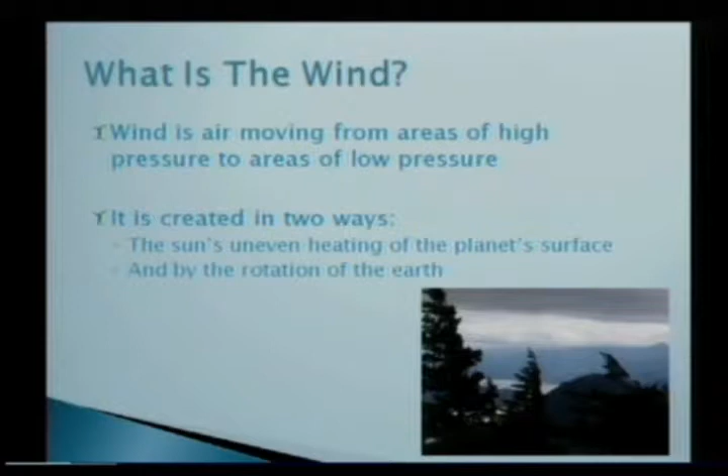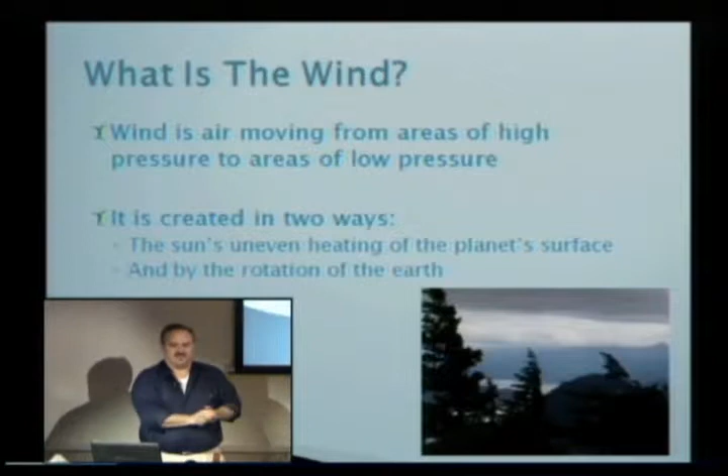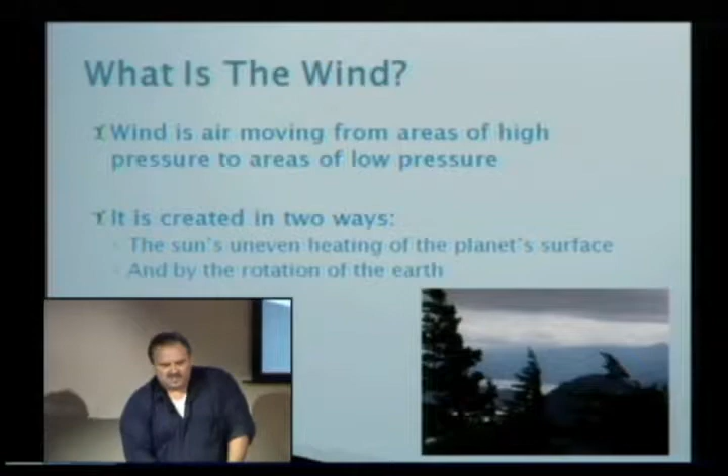First question, to establish a baseline: what is wind? Basically, in its simplest terms, wind is air moving from an area of high pressure to an area of low pressure. It's created in two different ways. First is the uneven heating of the Earth's surface—if the sun hits a lake, it heats up at a different rate than if it was hitting a forest or a pasture. Also, the fact that the Earth is moving gives a certain spin to the atmosphere. So that's, in essence, where wind comes from.

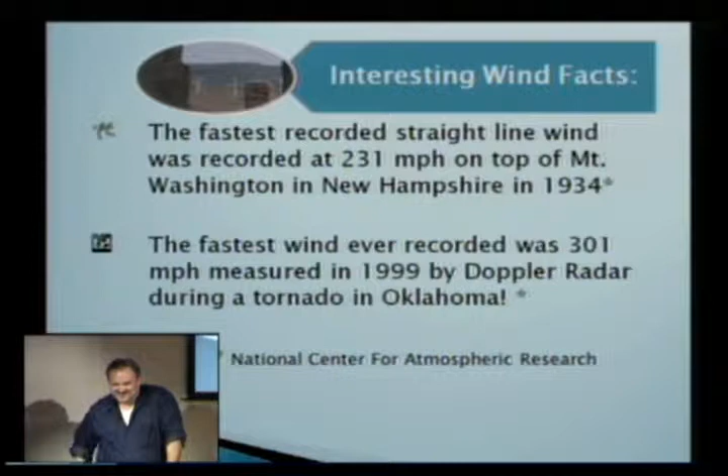The fastest recorded straight line wind was 231 miles per hour on Mount Washington in New Hampshire in 1934. The fastest wind ever recorded on Earth was 301 miles per hour, measured in 1999 with a tornado in Oklahoma.

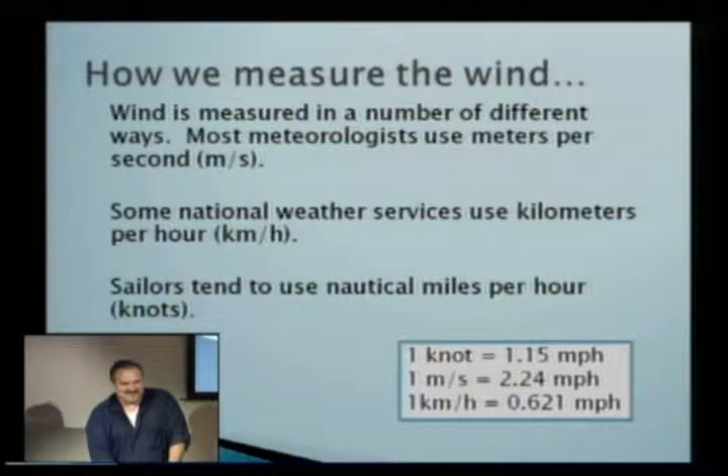How much of the wind can we harvest? The Betz limit is basically a theoretical limit to how much of the wind we can actually capture and transfer into energy. The wind passing by the blades causes them to spin, and that's where you get your energy from—that rotational force. If you tried to capture all of the wind, you wouldn't have blades, you'd just have a disc, and it wouldn't move. So he did a bunch of math and figured out that the theoretical limit is 59.3%.

Now that doesn't mean a wind turbine's operating at 59.3%. It means that's the theoretical max. By the time you factor in bearings and inefficiencies in the system and such, generally speaking, the amount of potential energy that we actually capture is only between 10 and 30%.

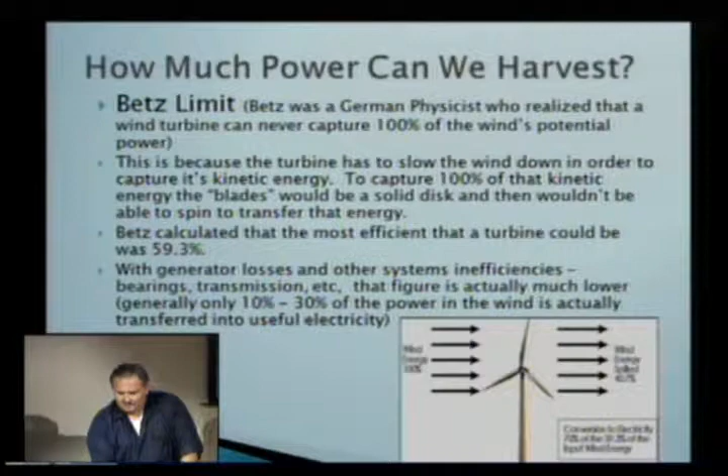And you guys can stop me at any point if you have any questions, and I'll say I don't know. No? Okay, turbine math.

Subject to the Betz limit, there are three components that go into calculating the power in the wind: the wind speed, or velocity; the swept area of the blades; and the effect of elevation and temperature on air density.

Who can tell me what the little symbol means, or what it's called? Rho, yay! It took me about 2 hours, yay! I couldn't remember—how do you remember what you call a Greek alphabet letter when you don't know what it's called?

The formula to determine the amount of power is one half of rho times A times the velocity cubed.

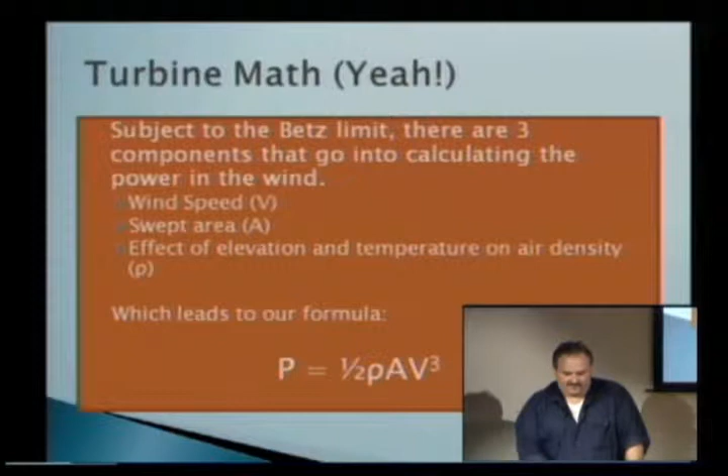Why do they build them in the sky? So the blades don't hit the ground. Ba-dum, boom. We'll be here all week.

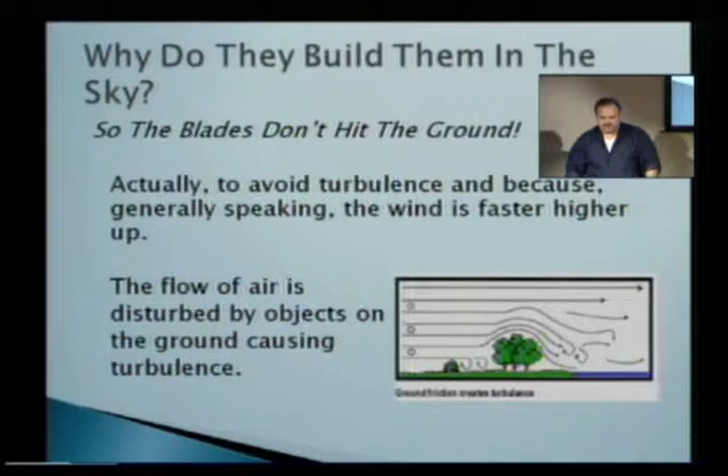Actually, it's to avoid turbulence, and because generally speaking, the higher up you go, the faster the wind goes. Part of the reason for that is the friction the ground causes. Then you've got obstacles—buildings, trees, hills—that cause turbulence and cause the actual wind speed to slow down. So basically, it's to avoid that turbulence.

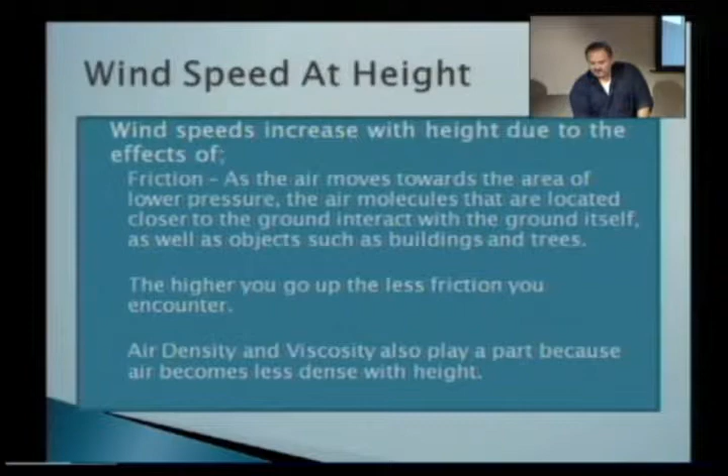Wind speed increases with height due to the effect of friction, as I was saying. The air molecules that are lower to the ground interact with the ground itself and with the trees and such. The higher you go, the less friction you encounter. Also, air is really kind of like water—when you go to the bottom of a swimming pool, the water is a lot heavier, a lot denser there than at the top. That's because the stuff at the bottom has all the weight sitting on top of it. Exact same thing with air. So the higher you go up, the less density you have.

It's just, you can spend days, weeks, months, years there.

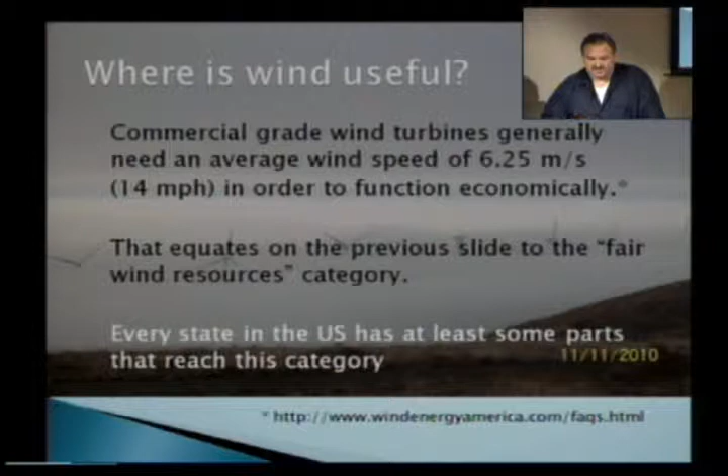History of wind as an energy source. Probably the first use of wind as an energy source dates back to 4000 BCE, when the Phoenicians and Egyptians first used sails on wooden rafts. Around 1 AD, the Greeks invented the first known wind machine powered by wind, and the first use of wind to generate electricity was in Scotland in 1887.

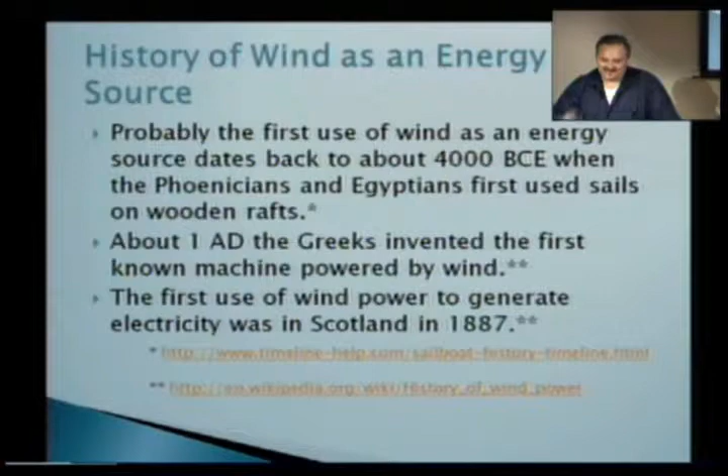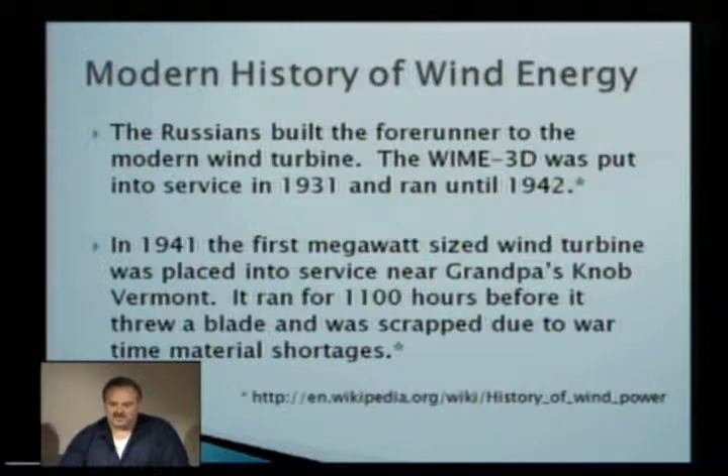The Russians built the forerunner to the modern wind turbine. It was put into service in 1931 and ran until 1942. In the United States, in 1941, the first megawatt-sized wind turbine was placed into service near Grandpa's Knob, Vermont. It ran for 1,100 hours before it threw a blade and was scrapped due to wartime material shortages. The reason I point that out is it's not a new technology. A lot of people think these wind machines are high-tech, and they are by all means, but the basic concepts have been around for 150 years.

Wind and the OPEC oil embargo. In response to 1973, the Organization of Petroleum Exporting Countries had an embargo where they got together and said, we're not going to sell you our oil. And everybody in the United States went, oh my God! If you go and read up on the time, I remember having to sit in line to get a tank of gas. It was a different time - there wasn't a 24-hour quick trip. But anyway, by the 1990s, decreases in energy prices had caused that energy push to pretty much come to a standstill.

The energy density of wind and all the renewables is less. This is the first time in human history where we're moving from a more energy dense environment to a less energy dense source of energy. That's the first time this has ever happened. Every other time, like when they went from wood to coal, coal has a lot more energy stored in it than wood did. Now we're going to something that has less energy stored in it.

Starting in the 1980s, spurred by rising costs and environmental concerns, people started looking at wind seriously. Various states, starting with California - they're usually first in everything on this - talked the federal government into encouraging wind and other renewable energy development. Since the beginning of the 21st century, commercial wind electricity generation has been growing by 30% per year. It's a growth industry. Unfortunately, if you look at the curve on paper, it looks like it's been pretty much straight up, but there's a lot of zigzagging that goes on inside the curve.

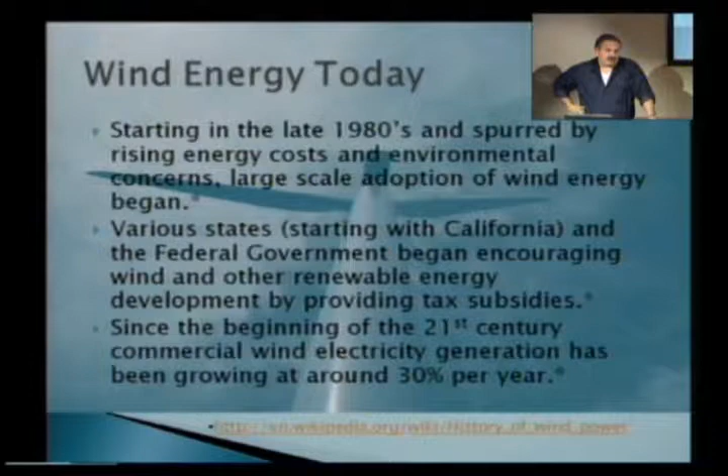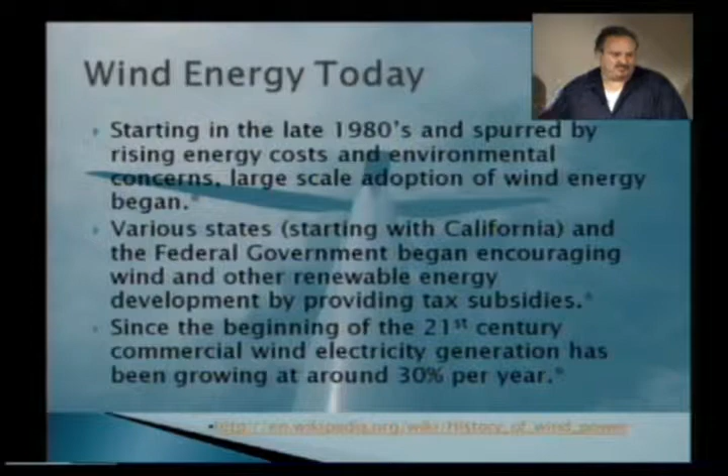Right now, we're in a position where the production tax credit, one of the subsidies that has spurred a lot of this development, more than likely won't be approved for next year. If you were investing in a $100 or $200 million wind farm, you'd like to know the government supports are going to be there. Even if they were to pass it today and say, okay, we're going to have it, so many things have been ramped down, so many projects shelved, that it would take another year or two or three to get back up to where we were just a year ago. So politics does come into play.

A lot of criticisms of wind - have you guys heard any of these? What are some of the ones you've heard? They're ugly and they're loud. Ugly, loud, okay. Kill birds. Okay, cool.

I learned they're loud. Aren't they getting quiet? Yeah, they have actually gotten a lot quieter. When they went from the 2-blade design, which were the ones out in Palm Springs we were talking about earlier, those were real loud because they're really chopping at the wind. The 3-blade design, you don't get nearly as much. Plus, a lot of the noise from the older ones was from the mechanical things inside.

But it is the set of the sails, not the direction of the wind, that determines which way we go. That's by a guy named Jim Rohn, he's my favorite business philosopher. You can change the set of your sails, but you can't change the wind. It's going to come from whichever direction it wants to.

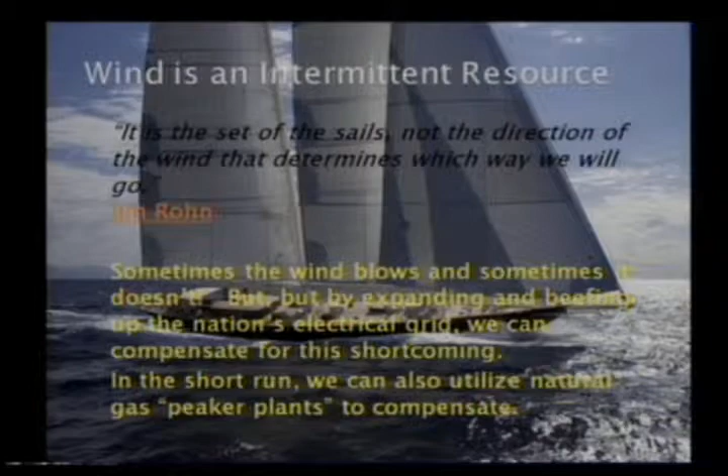But probably the biggest knock you'll hear about wind energy is that it's intermittent. The wind doesn't blow all the time. Sometimes it blows, sometimes it doesn't, sometimes it blows real hard, other times not. Okay, that is true, there's no denying that.

However, it's something that can be engineered around by beefing up the grid so we can transfer energy. If the wind's not blowing in North Dakota today, it might be blowing in Southern California, or off the coast of North Carolina. If you build the grid beefy enough to transfer those electrons across the country, you're going to have losses due to transmission, but the fuel source is free for all practical purposes. So even if you have to overbuild your capacity to make up for the losses in transmission, it still makes sense to do.

So is it really a concern? It's something that needs to be addressed, but it's not a deal killer.

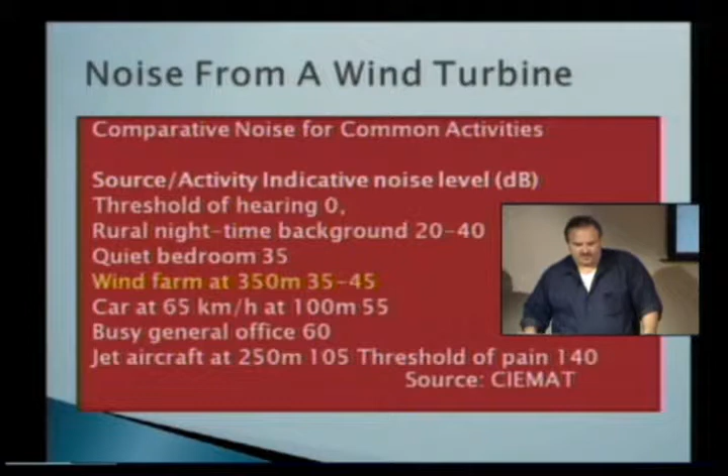Noise, okay, comparative noise for common activities. Threshold of hearing is 0, rural night background 20 to 40 decibels, a quiet bedroom at night 35 decibels. A wind farm at 350 meters away, which is the minimum you have to set it because the blades do throw ice every once in a while, so you don't want to be really close to one when it's icing, measures 35 to 45 decibels. So as you can see, the noise issue really isn't that big of a concern.

I toured a wind farm out in Central Oregon, and was standing—you'll see the picture, I'll show you in just a little bit—but it was a very windy day, and I was standing right beneath this wind turbine, and you could not hear the wind turbine over the rush of the wind past your ears.

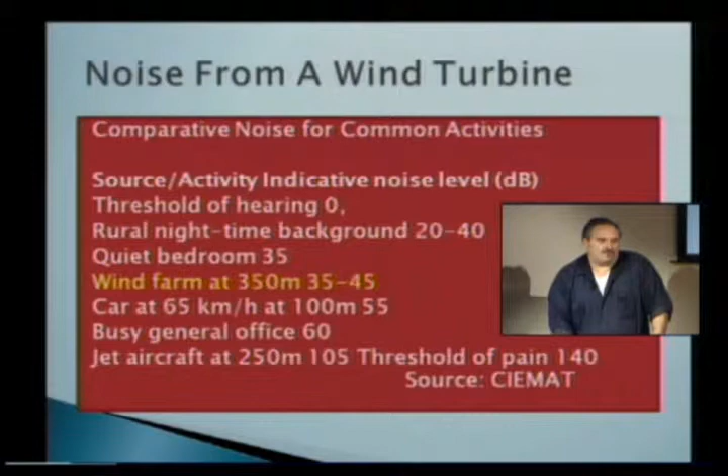So there is some debate on low frequency sound, which I think is still being studied. But from everything I've read, and I do attempt to be objective—just so you know, most of my business is in solar, I went to school for wind, but my professional expertise is in solar, so I don't really have a dog in the fight—I'll tell you the good, the bad, and the ugly as far as I see it.

Bird deaths, who can say that word, anthropogenic, is that right? Okay, bird mortality. Buildings and windows kill 550 million birds per year—a lot of birds. Cats, 100 million. High tension lines, 130 million. Vehicles, 80 million. Airplanes, 25,000. We've had a rash of those—have you seen in the news where birds have been running into airplanes lately?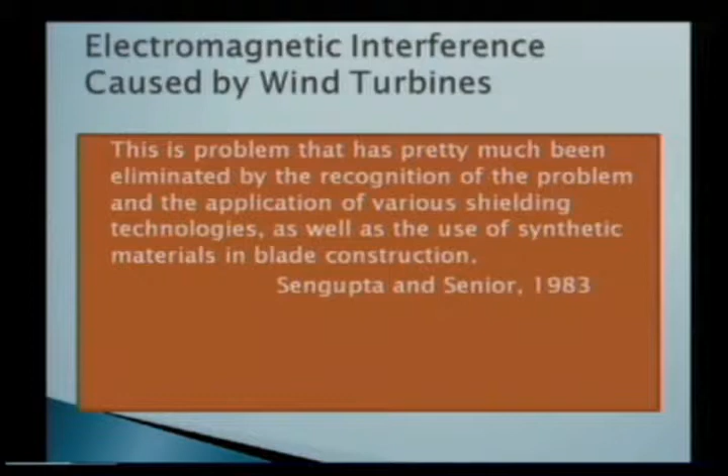Electromagnetic interference caused by wind turbines - it's for the most part been addressed, but a funny story I read: there's an Air Force base out west in Colorado or Wyoming, and one day it was kind of a foggy, nasty day, maybe a little bit of thunder showers in the area. The guy looking at the radar screen, all of a sudden it looked like there were 300 incoming airplanes. It was like DEFCON 3. It turned out that it was just a weird set of atmospheric conditions, and the 300 incoming planes were actually the wind turbines at the wind farm not too far away.

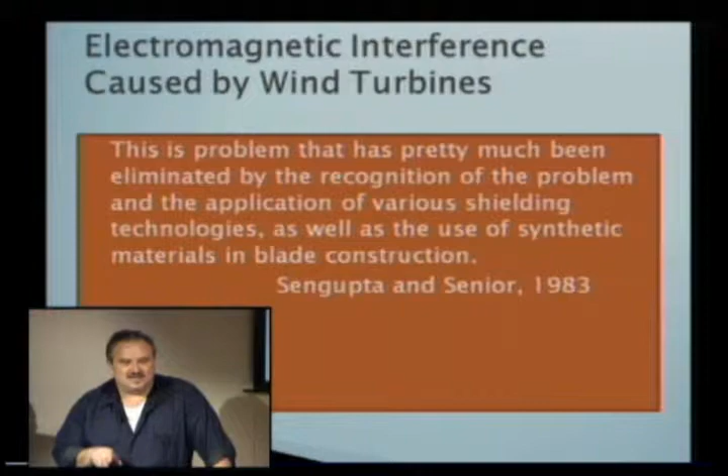It turned out that the radar system had basically been built in 1956, so they upgraded that. They've also insulated and used synthetic materials to block the effects of electromagnetic interference. Anytime you have something churning out megawatts of electricity, you're going to have some electromagnetic interference - it just goes with the beast. But you can shield against it, and they can.

Again, on the wind farms, you see everybody walking around with their cell phones, with their earbuds in and everything. No one seems to be pestered by it. So my radar detector worked, so I was happy with that.

Aesthetic impact of wind turbines. My big thing on wind turbines, as far as how they look, is you've got to put it in perspective.

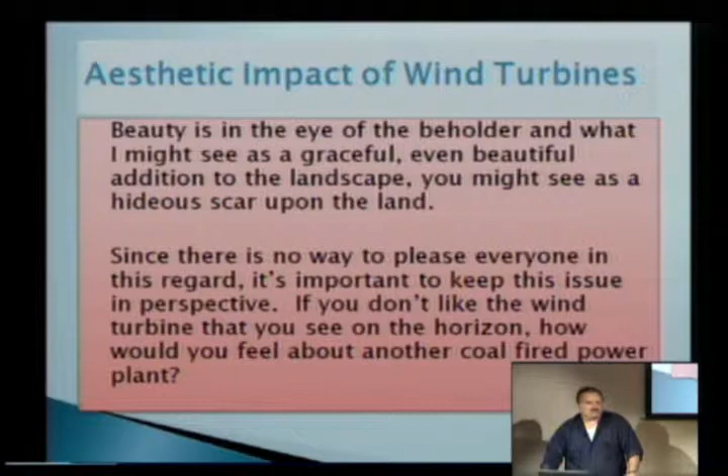When my wife and I were driving from St. Louis to Oregon for me to go to wind school, when we saw the first ones, we pulled over and went, 'Oh my God, they're beautiful, they're gorgeous.' Now, when we got up closer to the little town where we went to school, there were like 3 or 4 wind farms right together, and hundreds and hundreds of turbines. At that point, you know what? They started to look kind of industrial.

So beauty is in the eye of the beholder. What I'm going to ask is that you put it in perspective. We need the power, so you can either have wind turbines or a coal-fired power plant. Which would you choose?

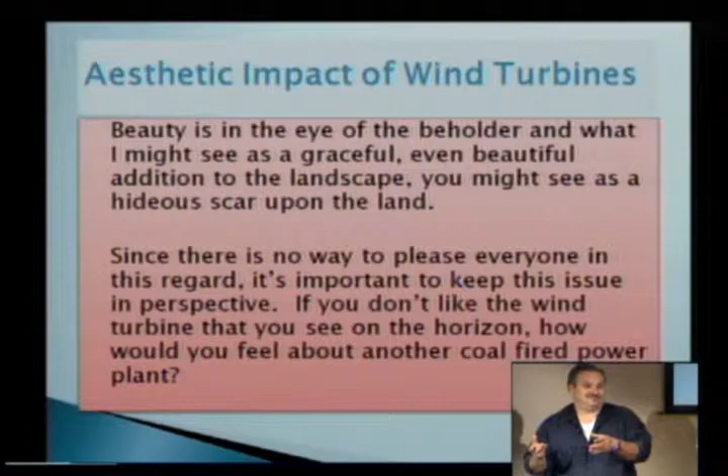Put it in perspective - different types of wind turbines. There are basically 2 different types of wind turbines: big ones and little ones. Actually, there's an entire spectrum of them, but they basically cut it into 2 different categories. Above 250 kilowatts is a big one, below 250 kilowatts is a small one.

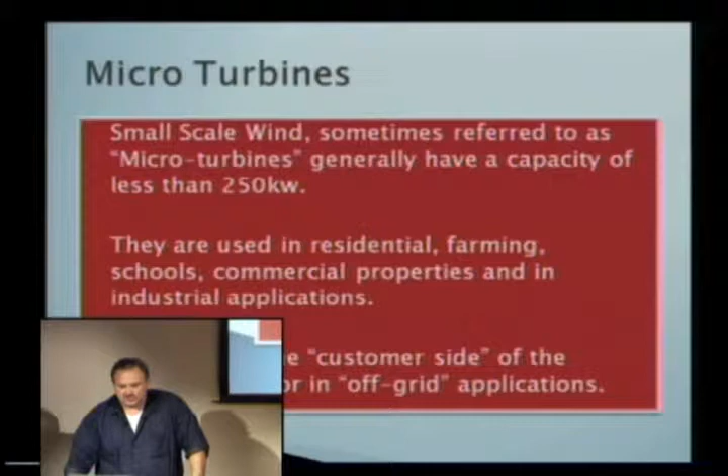But let's go back to big versus little. The little ones are generally used in residential, farming, commercial properties - they're generally on the customer side of the meter. It's just not economical for a utility to put up a whole bunch of 100 kilowatt wind turbines; they're going to put bigger ones up, so that will be on the utility side of the meter. If you have a farm and you're pumping water or generating electricity so you can watch American Idol, that's on your side of the meter. A lot of times they actually do off-grid applications where people aren't even connected to the grid, but for the most part, the intermittent nature of wind gets in the way of small scale wind as a reliable power source.

The small ones can have 2 or 3 blades, generally made of fiber reinforced plastic, that are guided into the wind by the tail. They're designed to furl out of the wind when it gets too fast so they don't hurt themselves. They have direct drive permanent magnet alternators, three-phase.

They pump out three-phase AC. It doesn't matter how fast it's going, it's going to pump it out - it just changes the voltage of how much comes out. Depending on the application, they have different controls that can be electronically manipulated into producing AC or DC, and they generally don't require as fast a wind as the big ones do.

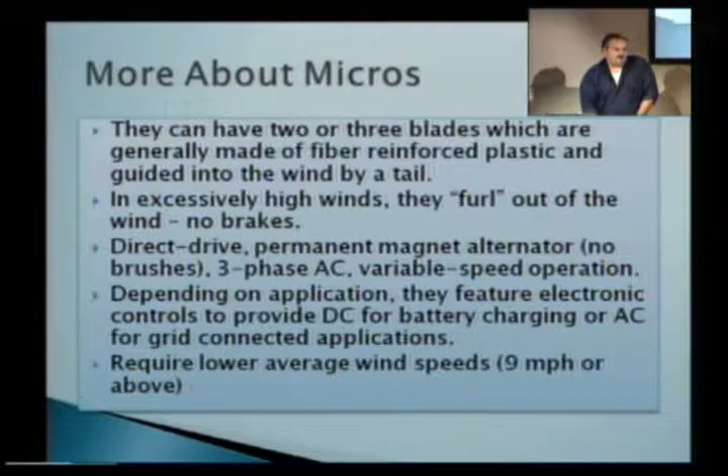What is furling? Basically, it's turning out of the wind. If the wind gets too fast to where it would damage the internal components, it's designed by the size of the fins on there so that when the wind gets too fast, it turns out of the wind so it stops spinning. Did that answer your question?

Cool, okay. Vertical axis ones - the big advantage is that you can put all the heavy stuff near the bottom: the generators, the gearboxes, all that sort of jazz. You can put it down near the bottom, you don't have to put it 300 feet in the air.

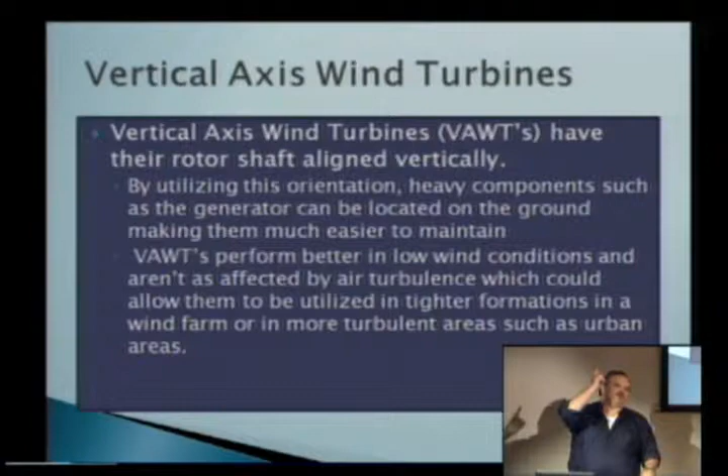And the bigger you go, when you're talking these offshore ones with 6 megawatts of power, those are big machines. With the vertical axis ones, you can put all that equipment at the bottom where it's easy to work on and you don't have to engineer around all that weight.

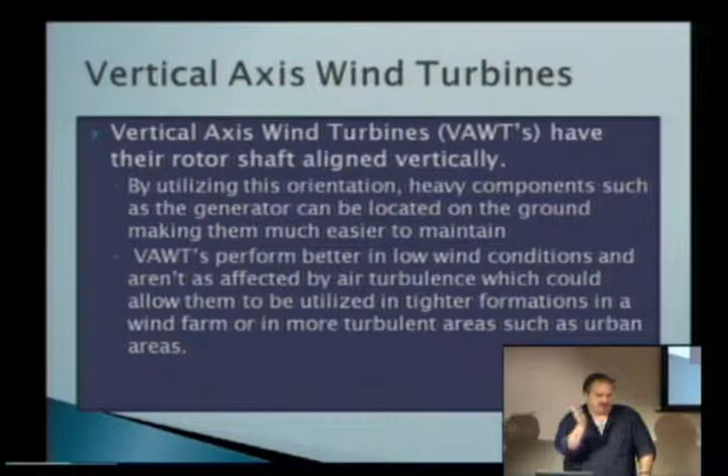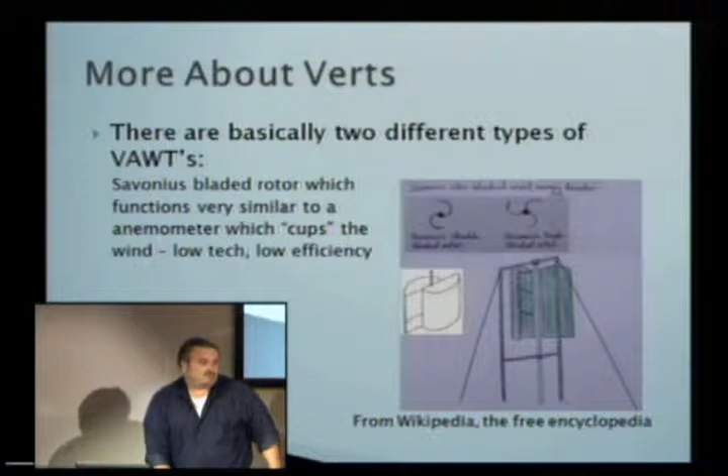There's two basic different kinds of vertical axis ones. There's the kind that cup - think of it like a 55-gallon drum sliced in half. You put it on a pole, it's going to catch the wind, and when it does, it's going to spin. Anytime you get that spinning, you can generate electricity. Low tech, low efficiency, but if you needed something just to get a little extra juice on a windy day for your off-grid setup, why not put one up?

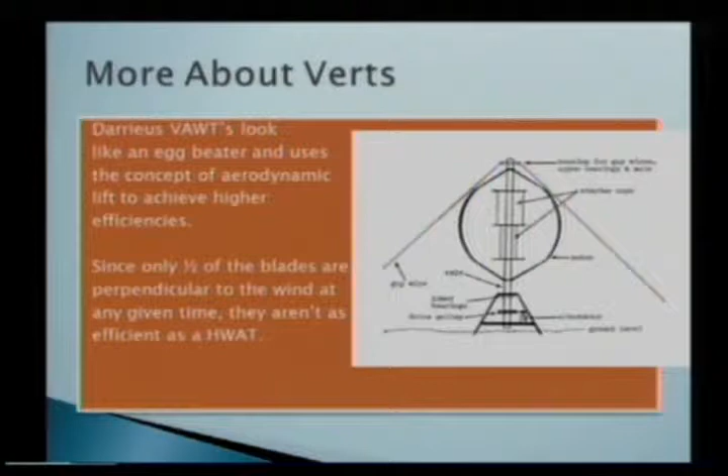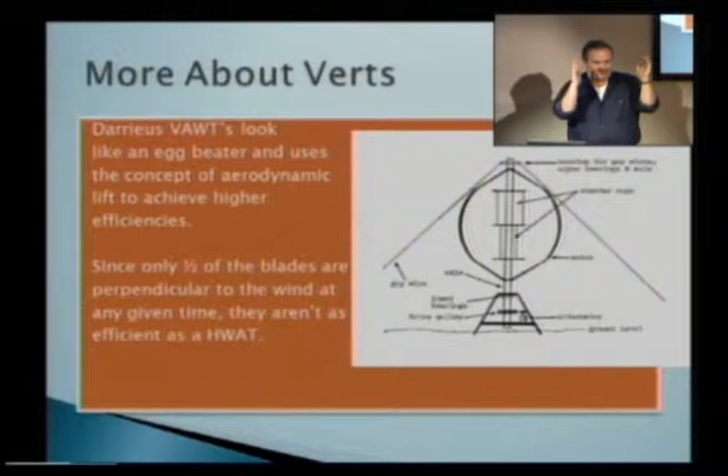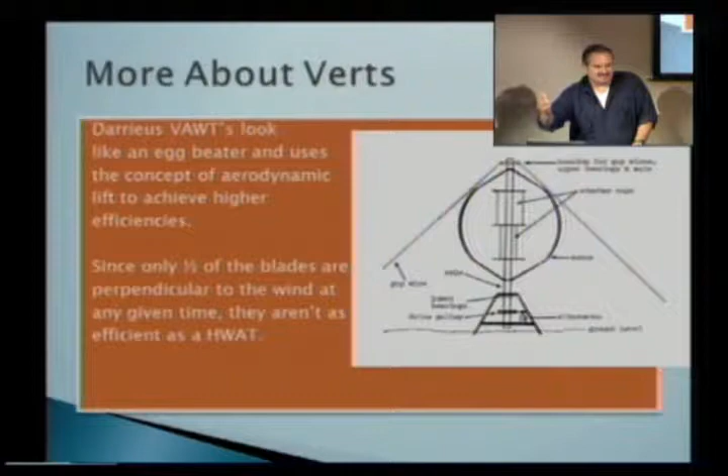The Darrieus wind turbines look like egg beaters. They can be very, very big and utility scale. They've had some problems with the material sciences that go into designing them, so those bent parts don't eventually flex themselves to death. The other thing is they're not very efficient, because at any one time, half of them is out of the wind - so when this one's catching the wind, the other one by definition isn't. It's kind of a whoop, whoop, whoop, whoop sort of thing.

Okay, here we go. What do these two things have in common? Any guesses?

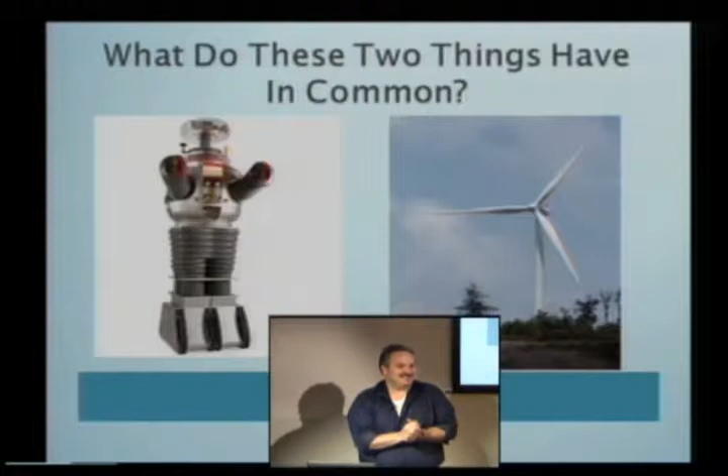They're both robots. Basically, a wind turbine is a giant robot. They have sensors that go out into the blades that actually measure the stresses at any particular point in the blade, which optimizes it to catch the most amount of wind.

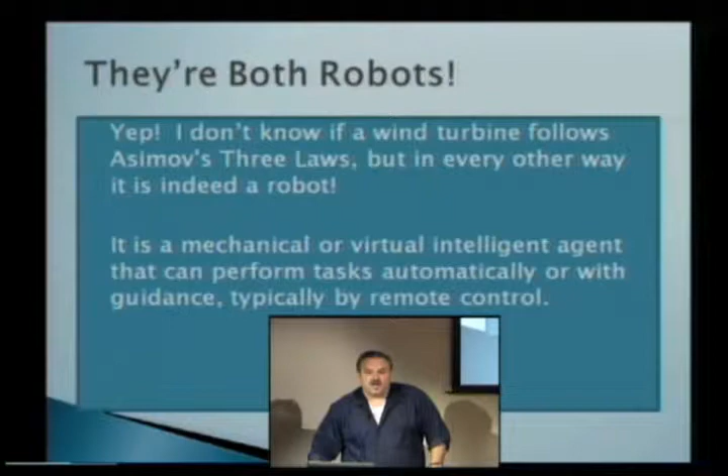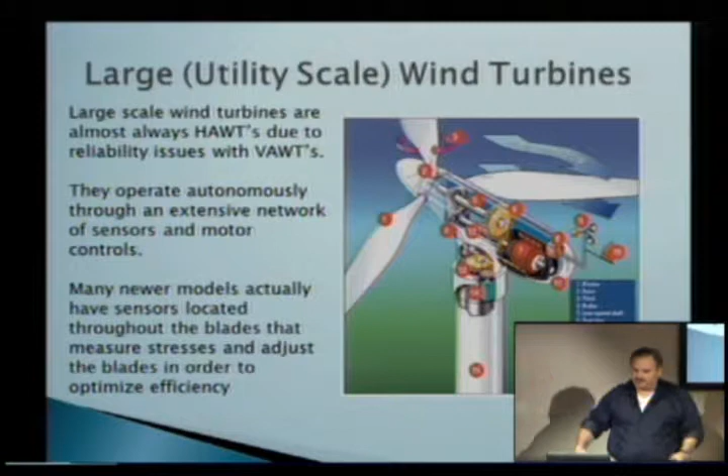Large-scale wind turbines are the other category, and this goes into the components involved. The big bulbous thing you see at the top is called a nacelle. Inside, anything bigger than a 2 megawatt, I could stand inside with the doors closed - and I'm 5'10", so somebody who's 6 foot, 6'1" would be able to stand up. So they're pretty big. You've got the blades, of course.

The blades attach to the hub, and the hub attaches to a shaft, which transfers the spinning energy. That turns a gearbox, which increases the spinning, which goes into a generator and generates electricity. It goes down the tower and off into the grid.

Like I said, I already went into the thing with the newer ones with blades that automatically optimize themselves. I thought that was pretty cool.

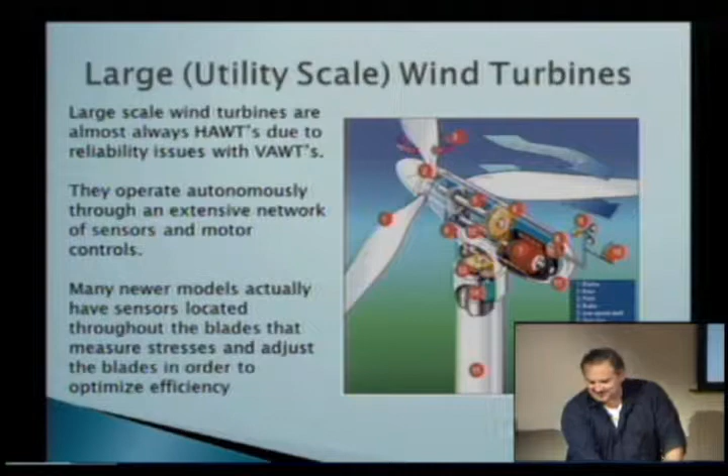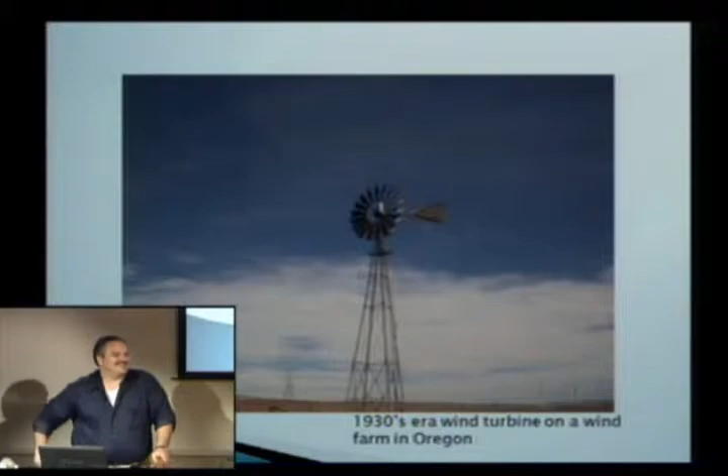Yes? So did they find that having 3 blades made it more efficient? Yes, and it cut down on the noise too, because the 2-blade versions were really cutting into it.

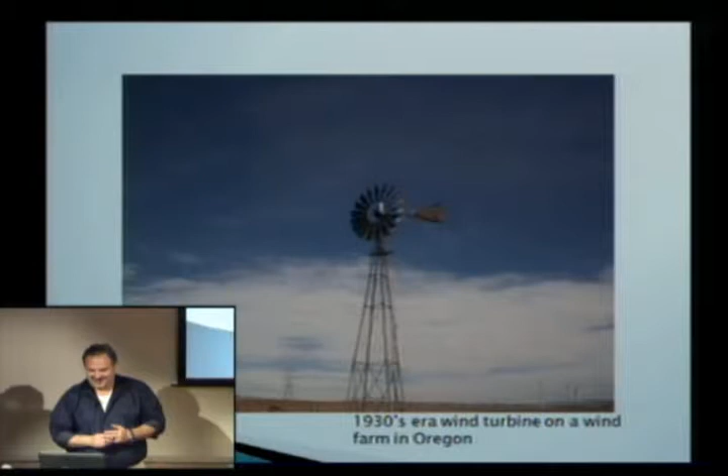Here's a picture of a 1930s-era wind turbine. It used to be out west, pretty much across the country—you'd drive and see hundreds of thousands of these things. Most of them were used for pumping water in the Great Plains.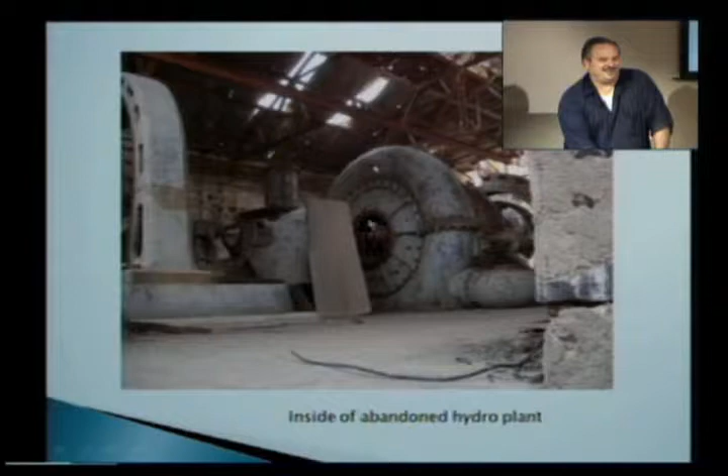So again, renewable energy has been around for a long time. This is something you probably won't ever get to see unless you get into the energy field. You saw the old version of the hydroelectric plant.

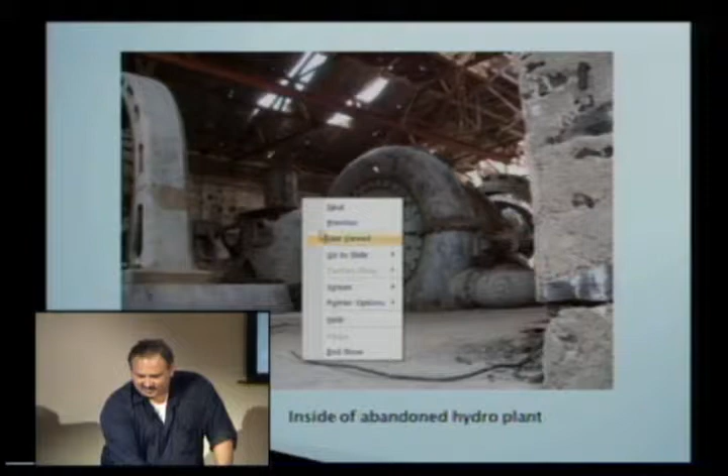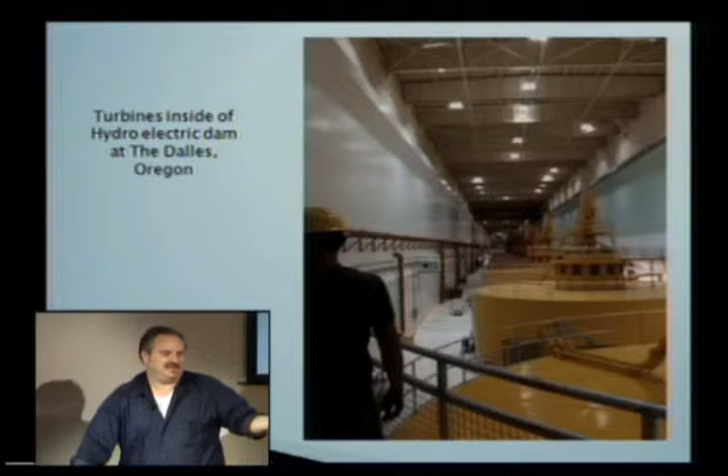That's the inside of the Dalles Dam. Have you ever heard of the Bonneville Power Administration? It's like the TVA, the Tennessee Valley Authority. They control the electrical distribution in the Northwest. This is one of their dams on the Columbia River, and I forgot how many turbines they had, I think about 13 turbines lined up. This one is actually the longest dam in the world. It's not the biggest by any means, but it's the longest.

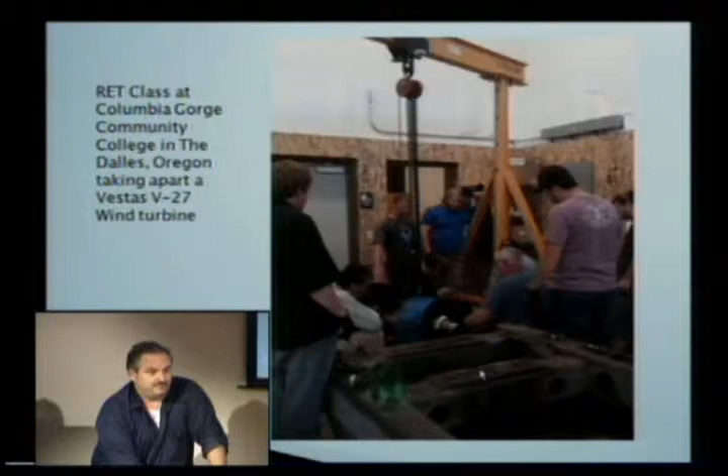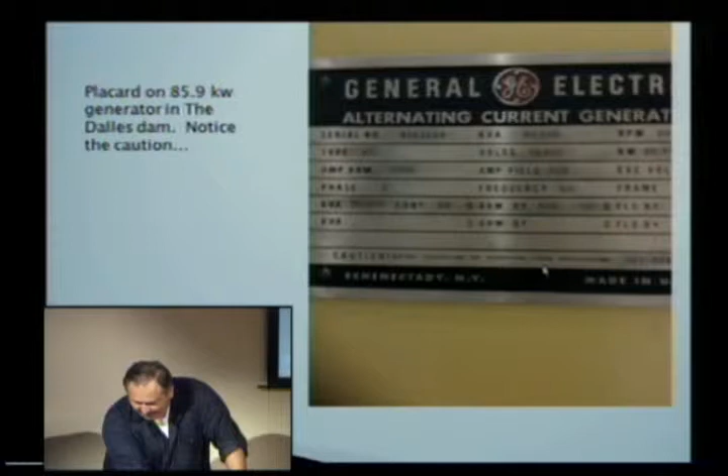This I got a kick out of. It's a little blurry, but if you look right here it says, 'Caution: before installing or operating, read instructions.' Always good advice. That was on one of those. So always a good idea to read the instructions.